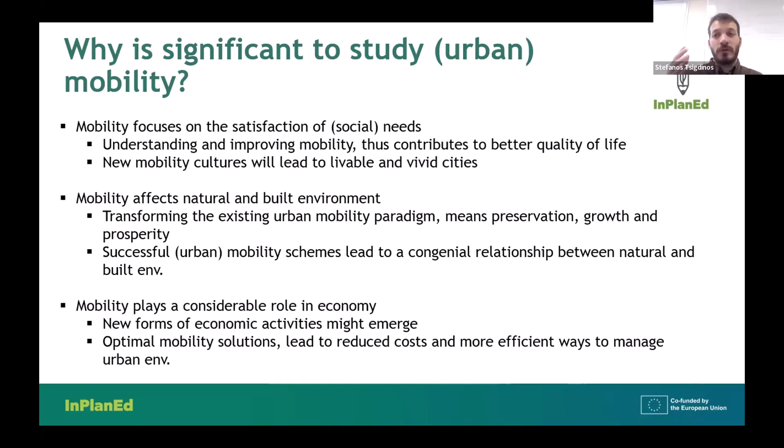Another example: when we make pedestrianizations, transforming streets from arterials into pedestrian routes or traffic calming areas with low speed limits, new economic activities might emerge. So mobility not only affects the way we think or how the environment is built and functions, but also the economic activity in cities.

Just a brief term, since we've mentioned sustainable mobility before, we should note what this term exactly means. It indicates a system where these three pillars are really considered and taken into account when we plan. It also tries to assess the needs of safety, respect the environment, and create a future that is viable for the next generations.

Finally, something very important about sustainable mobility is not only efficiency, but something very challenging that we have to promote in our planning perspective: affordability. It's something very important for our cities and urban areas.

Something I've mentioned before is that when we talk about sustainable mobility, because it has the term sustainability together with mobility, we have to underline the human experience. It's not only about being transferred from one place to another, it's not about moving from A to B. It's about living a new experience which is based both on efficient indicators, but also on how we perceive the environment. Are we feeling comfortable? Are we safe? Do we feel happy? Do we feel anxiety? Mobility is a human task, it's not an automatic procedure. We have to take into account the human perspective and how all these measures influence ourselves and our minds.

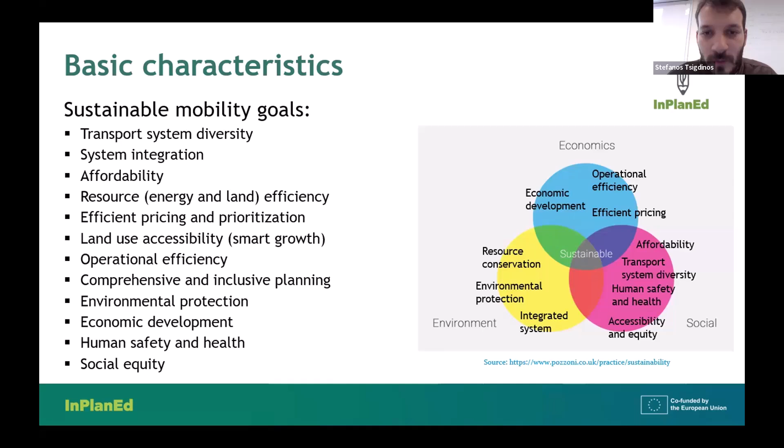About the principles, I'm not gonna read any of these bullets, but I want you to focus on the title. The first one is we integrate transport and land use, as we said, and we also have models to model that. This is very important because the first step is to understand it qualitatively, but then we also have models that could forecast different futures and integrate these two elements very efficiently.

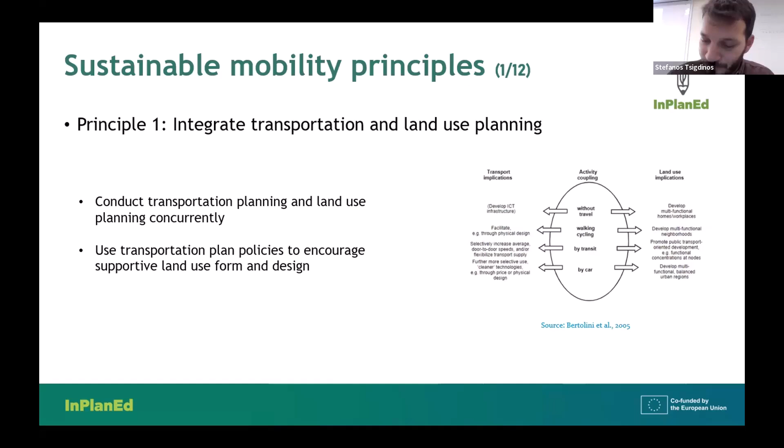Social objectives, inclusiveness: we saw that about equity, social cohesion, and also understanding the mindset of people that move around.

Economic development: mainly economic activity could be favored in two ways. By green logistics, this is one way, and we're gonna see a presentation on that in the next hour, and also through some local economy initiatives that are promoted through walking and cycling projects. This is also something we have to take into account when we plan our transportation system.

Principle 5: it's not only about transport, but in anything we do in this course in general, we have to adopt a strategic approach. Firstly, we have to understand our goals, understand the spatial level we are working on, and then we have to change our micro scale environment. So the macro scale is the strategic approach.

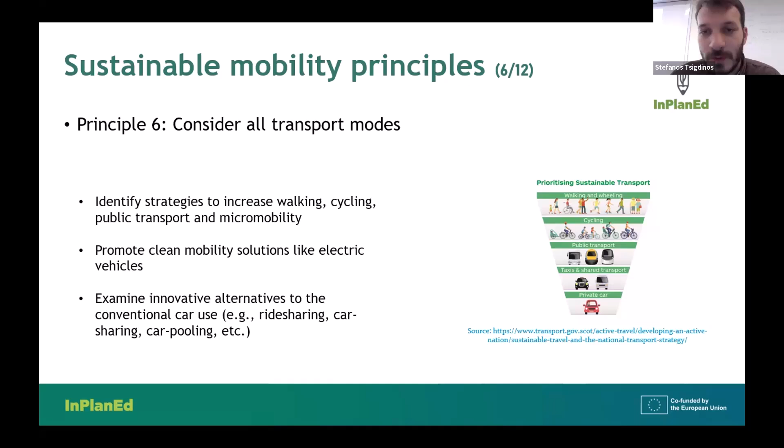So this pyramid is like an inverse pyramid of the conventional car-oriented approach. In this pyramid, the car is at the end inside urban areas. I'm not talking about rural areas right now, but urban areas, which is our scope. At the first row of this inverse pyramid, it's dedicated to people and human activity. We also have to manage transportation demand efficiently through some models or indicators.

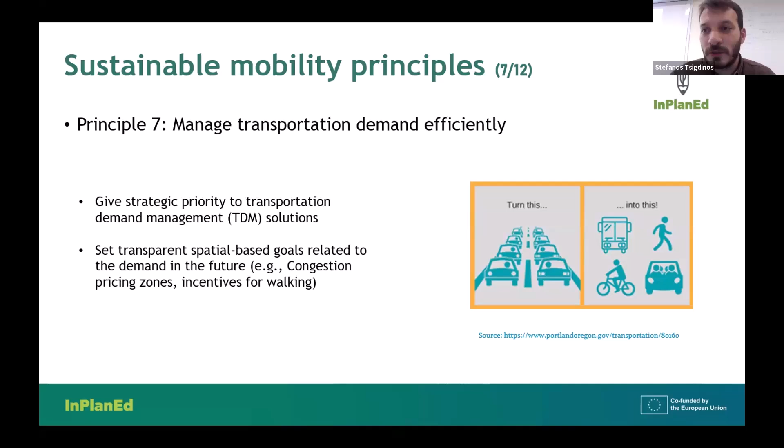It's very important to have some numbers as well, and also to identify strategies to maximize the multimodal capacity.

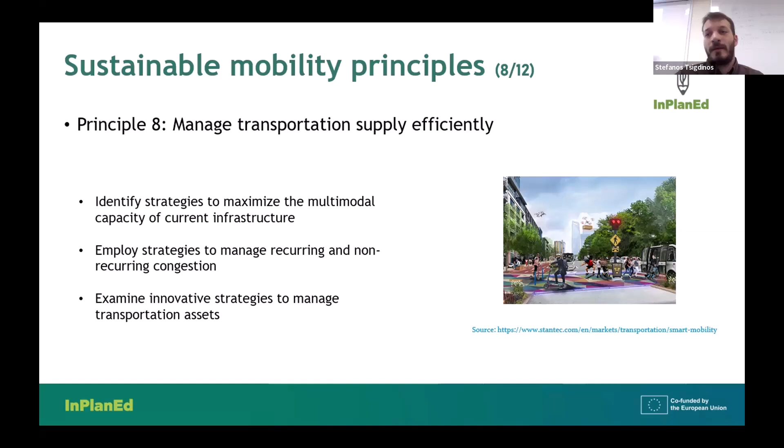What we mean by multimodality can be seen both ways. It can be seen when one individual takes different modes to reach his or her destination. On the other hand, it's also when we have a street and we can allocate space to different modes. For example, we have a bus lane, then a wide pedestrian sidewalk, then a cycling lane, and then a car lane. This is a multimodal street or a multimodal boulevard.

Of course, we have to guide the implementation, monitor that, evaluate that. This is very important for policymakers especially—not so much about academia, but mainly about practitioners and policymakers. When we talk about integrated planning, we have to be very clear with guides and also financial guidance, clear about the funding sources that we can use, and allocate different kinds of budgets, then connect that budget to different kinds of solutions.

So we are reaching the end of the principles. Very importantly, we have to measure the performance, so we need indicators. It's not only about making a different kind of project or idea, because if this is going to be implemented, then we have to monitor that. Is it okay? Do we create inequities? Do we achieve our goals? Do we have problems in these kinds of projects and interventions that we have proposed? So we need indicators, we need to measure performance, and this is very, very critical.

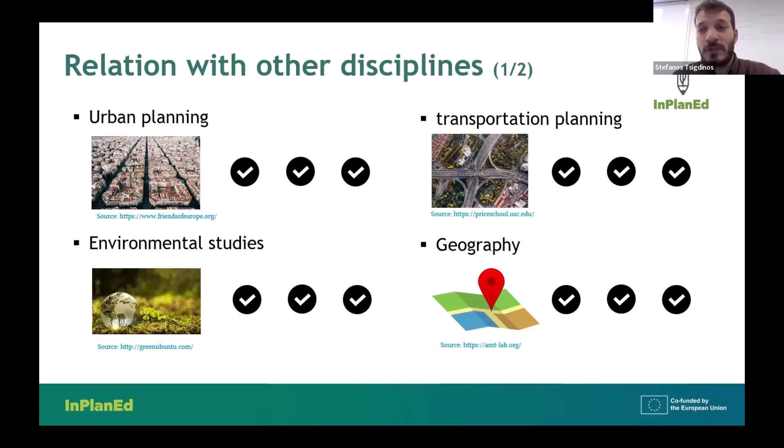So what is very important is how our mobility discipline relates with others. Mobility planning is very similar to transportation planning, however we have to take into account the difference that lies between these two terms—we referenced that at the beginning. But to move on, we have a great relation with urban planning, with environment and geography.

We also have some connection with economic science and maybe marketing, because when you want to promote sustainability actions and principles, you have to have a more societal kind of marketing, not enterprise or business marketing, something different. You have to promote that, be inspiring for the people, persuade them to understand or just to try sustainability. It's not that we dictate and are very strict—okay, you should use your bicycle from tomorrow on—no, that's not the correct way. The correct way is to get in touch with the people and understand them, and then promote your idea. By practicing and by examples, people will come gradually if they really do agree with the plans and use them and make them their own plans.

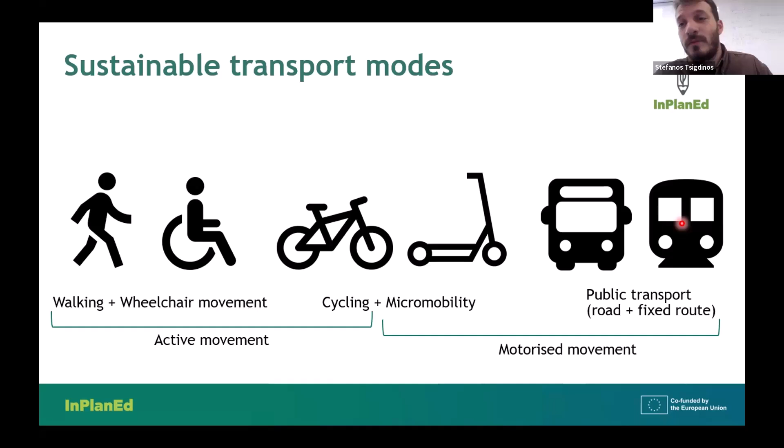So, some more things about the benefits of active movement. We can enhance public health if we walk or cycle. This is demonstrated through numerous research studies. It's affordable, at least till today.

I do not think they may come up with an idea to charge us to walk, but it's not something we should deem as a constant factor. We should claim our right to walk and cycle freely. Also, they are very environmentally friendly.

Honestly, they might be the most environmental way of moving. And of course, they can improve the quality of the urban environment, because these two things go hand in hand.

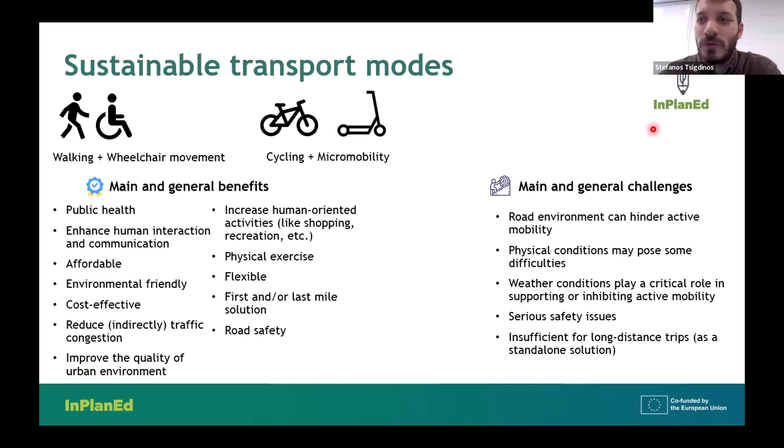Weather conditions are very important, and active modes are somehow insufficient for long distance trips. For example, if you want to go from one city to another, probably you won't choose to walk. That's why we need sustainable transport modes, because they do enhance road safety. Fewer cars on the road mean we have the opportunity to promote buses, trams, and the metro.

Modes should be affordable, at low cost or even free sometimes, because there are examples of cities abroad, like the entire Luxembourg or Estonia, that have tried these systems. They have many benefits and also challenges. We may stick to the benefits compared to a car-oriented reality where we have to pay and cover all the costs related to owning and moving a car. Also, we can be very effective towards traffic congestion because of fewer cars.

At the same time, we can fit many people inside these modes. For example, if we need 1,000 people, we can use 2 trams, compared to 250 cars. The space taken and needed for all these cars is very different than the space needed for public transport modes.

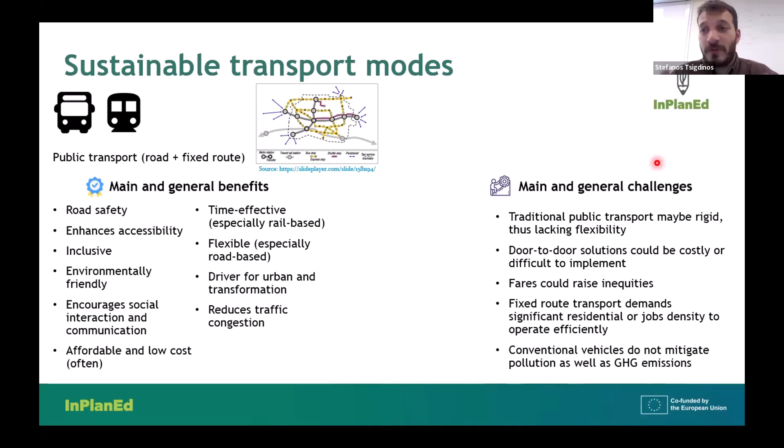So about urban mobility users, we have to say a few things, and just see some pictures, because sometimes pictures are more descriptive and understandable than writing bullets and text. There are various users in the street space, and understanding users is complex. We have to understand the interaction between them, because one user may be harmful to another, or one user may be beneficial to another. We have to understand the conflicts, the differences, and also the cooperation.

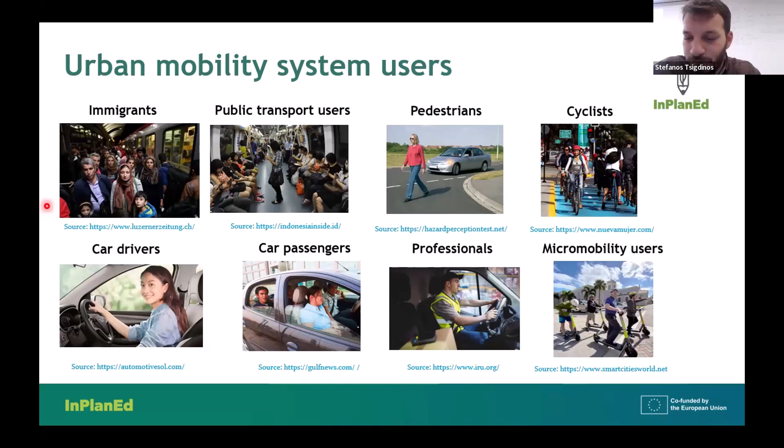Also, public transport users who do not own a car and are mostly dependent on public transport - they are a different kind of group: pedestrians, cyclists, and the final groups are, of course, car drivers, which is different from car passengers, because car drivers have a different kind of attitude in the street. Professionals is something we may sometimes forget, because the life of a professional needs different treatment compared to a pedestrian. And of course, the final one is the micromobility users - so these are all the users that we can see.

Also, if you have any other idea, we welcome you to mention that. But the users should be the focus of our planning perspectives. So what about an integrated approach?

We're going to see some examples right now in the minutes we have left - I have 10, maybe 15 minutes? Perfect. So, traditional planning approaches are monothematic, monofunctional.

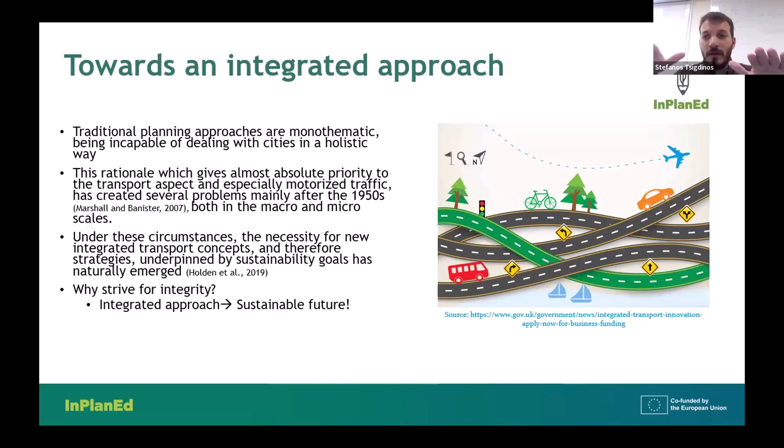They see that each kind of transport mode is separated compared to the others. So we have to change that, to really rethink that rationale. We have to bring different transport modes together, and under these circumstances. The circumstance would be to make things more integrated. So we have to think of some strategies, firstly, before we change our environment, that connect land uses and the transport modes.

One very important kind of planning strategy is the street classification - how we classify the streets. You have seen, for example, that Google Maps has different colors according to the role of the streets. So this is a kind of classification: the motorway, the primary arterial, the local streets, the pedestrian streets. The conventional approach also has one kind of classification, the traffic related one.

But what we should do, and in our course we are just taking a glimpse of this classification approach, we have to think of a matrix here, where one dimension is the transport connection, and the other dimension is the urban role and the urban importance, let's say. Through these cells, we can understand streets and transport planning through an integrated way, simultaneously.

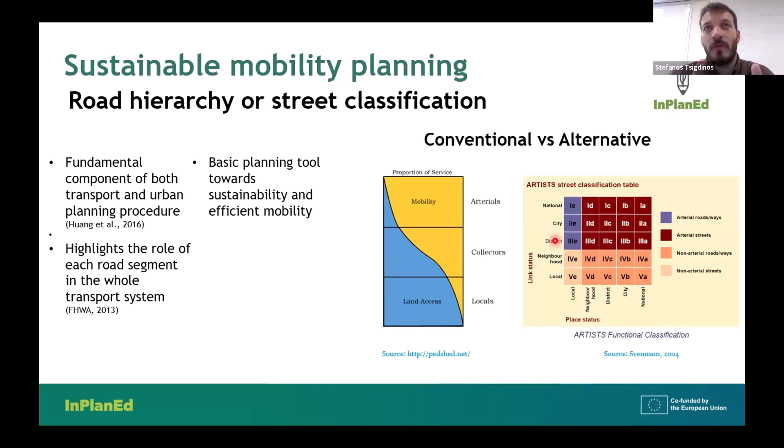Urban planning on one side, transportation and mobility on the other. This is something very important for future perspectives related to integrated planning, because we see these two different dimensions together. This is critical for the future.

We can see an example. Here is the conventional one, which is like motorways everywhere - they are spread and penetrating. The center here is Athens, the metropolitan area of Athens. Here's the center of Athens, and we can see all these motorways. But we have to take into account a different perspective and transform our city.

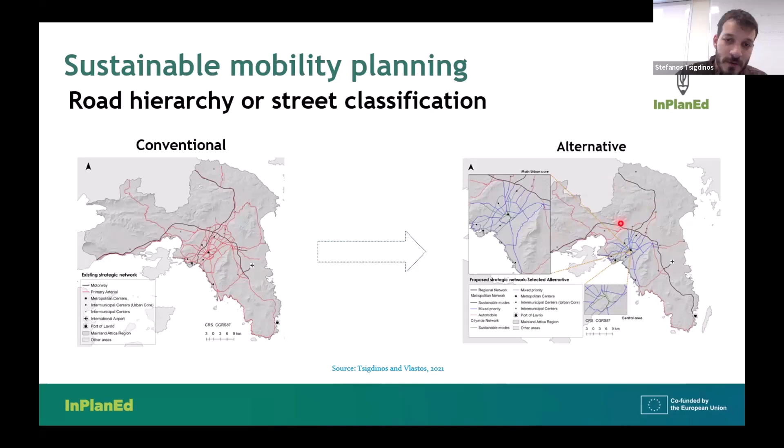Okay, this is a plan, of course it's not implemented, unfortunately, but it's a plan that we have to protect the center. Here is the center, and also in this kind of area with the blue color, we have to promote public transport options, and cars should be mainly prioritized in the peripheral roads.

Another kind of initiative is the super blocks. When we talk about super blocks, it's about protecting some blocks within an area. Here we can see this model is from Barcelona. They have taken their building blocks - if someone has visited Barcelona it should be easier to understand this kind of conceptual plan. What they do is merge these different blocks and create a super block.

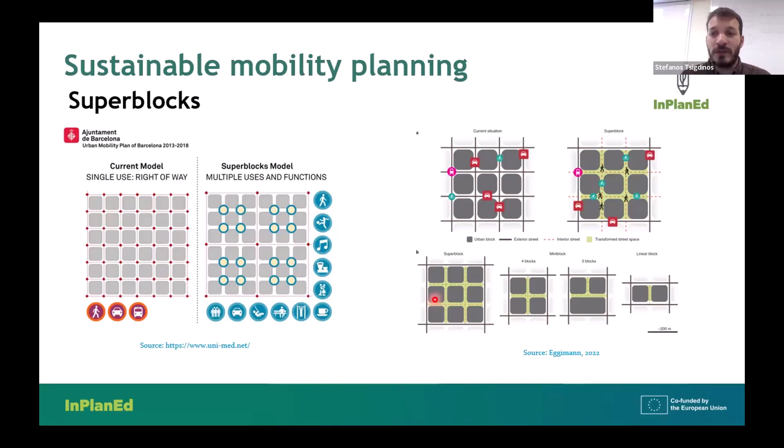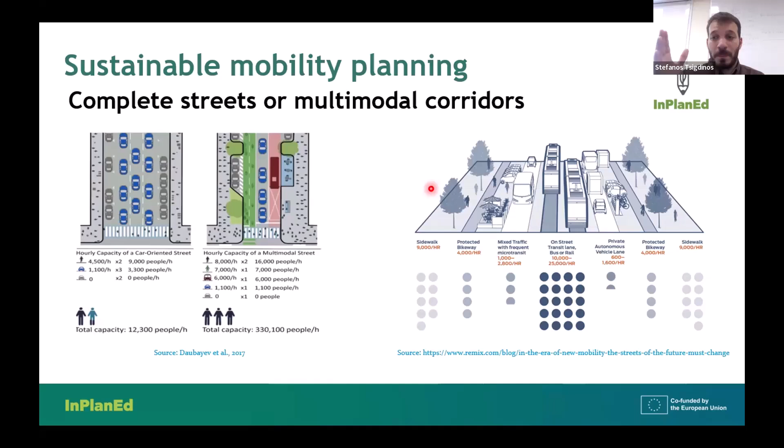Another one: the complete streets, multimodal corridors. I've mentioned that before. Here is the conceptual picture of that, because it's easier to understand through seeing this picture. Here we have the sidewalk, we have the cycling lane, we have the mixed traffic with some buses and cars, and we have the fixed route system with a streetcar or a tram. This is truly an effective perspective example of a multimodal transport plan.

We are reaching the end, and last but not least, we have some indicative measures. Walking routes - we say about walking, about a different kind of urban environment. So what we need are walking routes. They have to be connected. We have to implement crosswalks. We have to construct sidewalks with great width, so they can be accessible. We also have to note the streetscape features like benches, signs, or bus stations, everything.

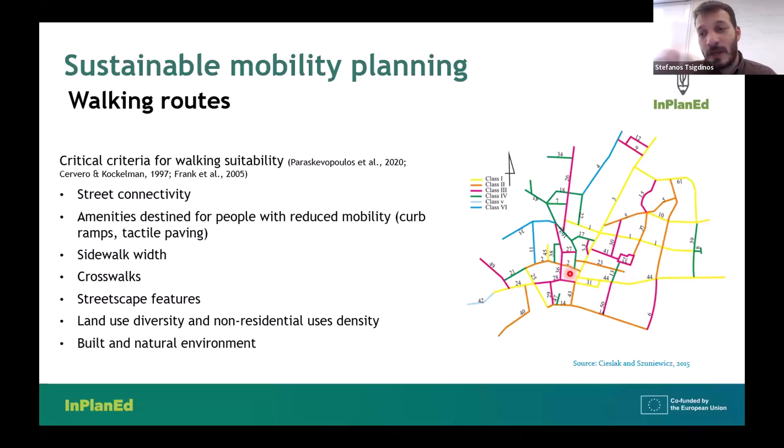They should be connected with what people, visitors, find significant. What makes them comfortable? What enhances their comfort? What makes them feel safe? What makes them feel happy, through constructing and implementing - first designing and then implementing - the walking routes.

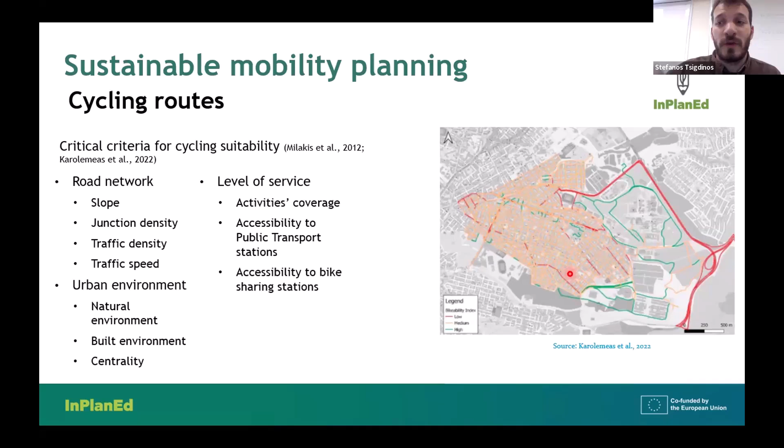In the same line, we have the cycling routes as well, because we have to take into account the road network, the natural environment, and the geomorphology. It's not easy to implement cycling lanes everywhere, so we have to utilize, for example, electric bikes on big slopes and stuff like that. We also take into account the urban environment, because planning a cycling route is very connected to the approach of walking routes. We have to utilize the roads that are more attractive to cyclists, and also cover different kinds of land uses and connect them together.

Public transport routes readability is very important. The systems should be readable to the user. For example, if you have 15 metro lines, it's very challenging to make users understand them easily. So we have to make a brand for each line, a name, a color. Here in Athens, we have 3 lines: one green, one blue, and one red. So it's easy because there are only 3, and it's easy to understand the difference between each line.

But if we imagine a different planning scheme with 9 lines, it will be more complex for the user to navigate through all these lines. So they have to be prioritized compared to cars in urban city centers, and they have to be direct, especially the trunk lines, the major ones, the corridors. They have to be direct.

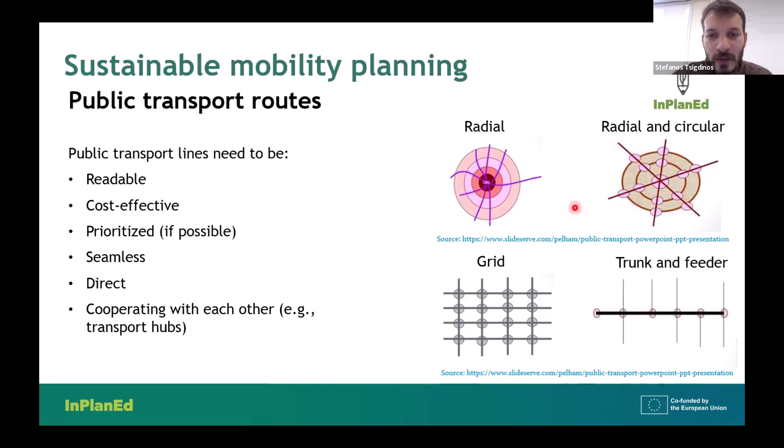So here are some kinds of connectivity types and how we can make the bus networks realized. For example, this is the radial, this is a trunk, and we have the feeders, and we also have a grid.

Another type of solutions, the last one we're going to see together, is urban planning and urban design solutions, because we have to take into account this integrated perspective, integrated approach. We have transit-oriented development, where on a buffer area around the station, you have mixed land uses. You have to enhance interaction between people there, and also make this kind of area really accessible. So it's a start to make a city that is really connected with the public transport lines.

It has some challenges because what about the other areas? Are they going to be abandoned? Are they going to be car-oriented? So it's something we have to take into account when we plan with this transit-oriented development solution.

The 15-minute city is something where, for example, in the center of your neighborhood, you can find many amenities and land uses within a 15-minute travel distance.

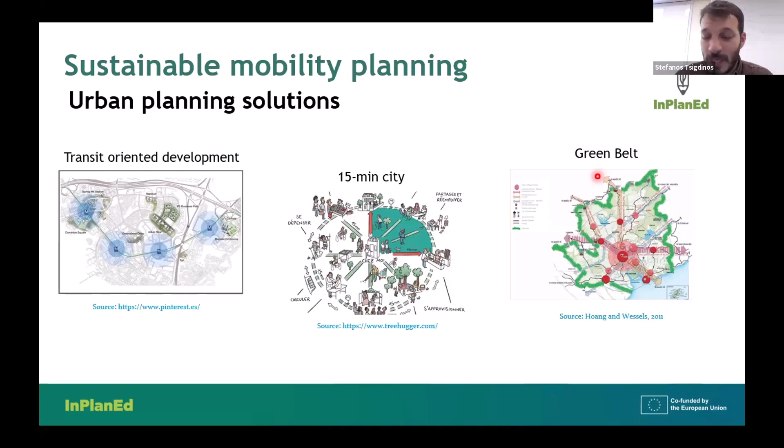But the 15 is something that is under question. It can be an X-minute city, because 15 minutes means something different in different cities. Also, another question is why city and not a neighborhood? It's also a challenge. So you can see that despite being solutions for sustainable mobility planning, there can be challenges as well. They're not the one and only perfect solution. We can change what we propose each time depending on the context.

We also have some design solutions, the final point, which is shared spaces or traffic calming measures. What we mean by shared space is sharing the street, so the car can pass by with a limit of 30 or 20 kilometers per hour, and people can walk together, because it has been demonstrated that in this kind of space, road safety goes up despite cars being there.

Because they must move with speed lower than 30 kilometers per hour. And we have to manage on-street parking, because it's very important where and why we can park, and utilize the space accordingly, either for parking or for widening the sidewalks.

And finally, we have open and play streets, which is a mode of temporarily closing the street and devoting the space for children to play or for other kinds of activities, for protests, for events and stuff like that.

So to conclude, it was like 50 minutes of sustainable mobility. It's a massive introduction, but it's very important to understand some points. So the main points to remember are that we have to integrate transport and land use, we have to take into account the human perspective, we have to be readable, we have to be affordable, and we also have to take into account the three perspectives of accessibility. That's all for me, and thank you.